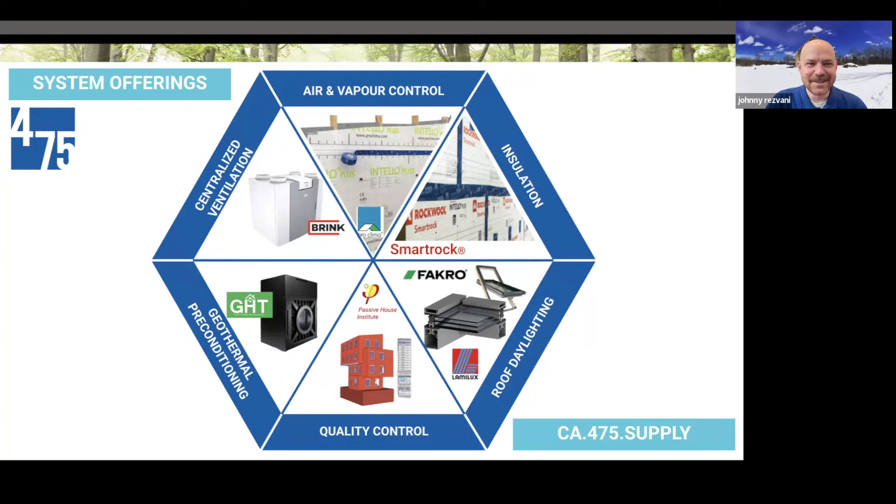This year we introduced a new presentation format here at 475 called Building Blocks. Last year, many of you joined us for our weekly Thursday office hours, which were helpful, but we saw an opportunity to make them even more focused and valuable. So we reimagined the format and launched this monthly series built around our most popular blogs, videos, and concepts.

Each month, Building Blocks gives us a chance to take one important topic and dig into it with a short presentation, followed by an open floor discussion where you can bring your questions, design challenges, or any issues you're facing on your projects. When we first came up with this idea, we honestly weren't sure how it would go, but we've now had 9 presentations this year, and the turnout and engagement have been better than we ever expected. It's been amazing to see how many of you show up and participate and help shape the conversation.

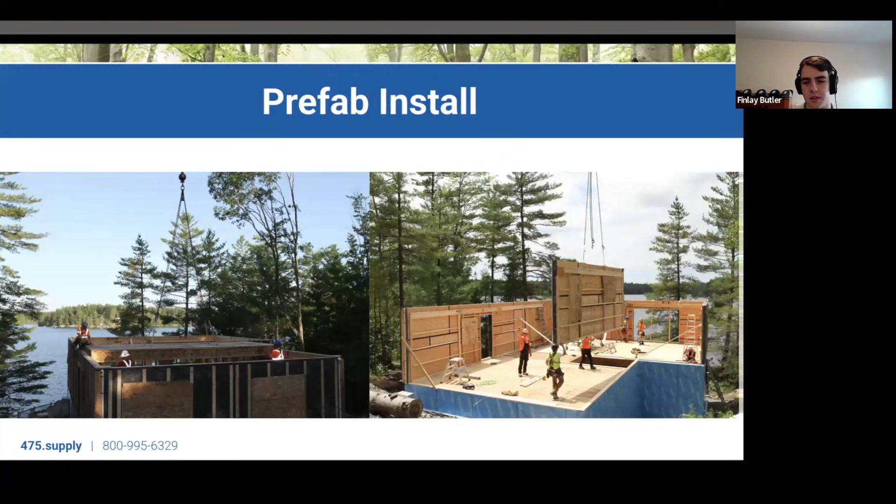So here are a few pictures of the install that are pretty cool. They have a huge crane on site and they're craning in all these huge panels. So floor systems, wall systems, and roof systems as well.

Here's a couple other great photos. The main aspect of this project that really stood out to me is that they did an open house last November for an event called Boots on the Ground, where they opened the site up to the public and gave a huge site tour.

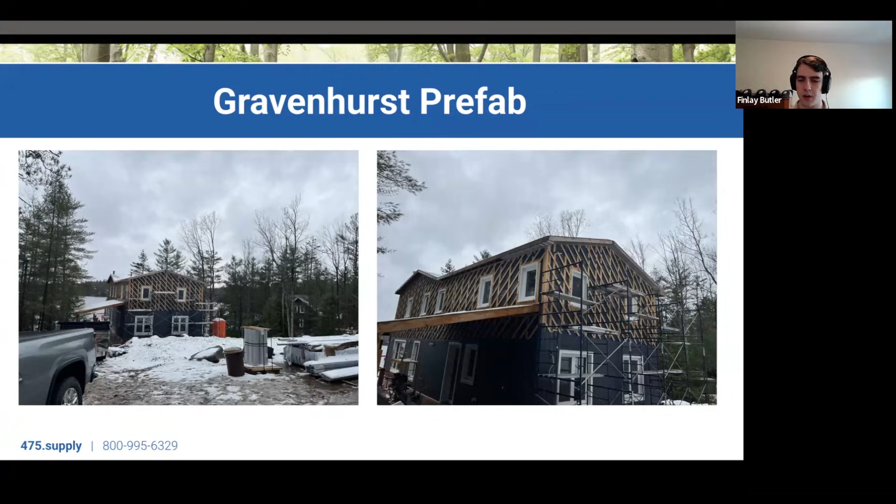They had employees from Simple Life Homes, Above Board Carpentry, and Stone's Throw Design all there, giving us a site tour, talking us through what went really well for them for this build, what made it really successful, some things they would want to carry on to their next prefab build, and some things they would maybe change for the next time they do a prefab build together. So overall a great project, and I'm super excited to see what they have in store for the future.

So the second project I'm going to be talking about is a project that's pretty special to me. It's a project by Greening Homes and again Stone's Throw Design. This project is really important to me because it was my first ever experience to high performance ever.

I actually visited this site before I was even working with 475 about a year ago. I was at George Brown College in Toronto in the building renovations program, and we were talking about all these great materials like monolithic membranes, smart vapor control retarders, high performance tapes, all these great products. But we were talking about them in a classroom setting. So it was great, like we kind of knew about them, but we didn't really know what it looked like on site. We just knew from photos.

So Greening Homes actually opened their doors to us. They shut down work for a day during the week and let 35 students come into their job site, gave us a huge site tour, and just showed us what high performance looks like on a project.

A little bit about the deep energy retrofit. It was a 1949 post-World War II bungalow with about 1,300 square feet of living space, and they turned it into a multi-generational home with around 3,500 square feet of living space. A little bit on the metric side, it scored a 0.94 on the ACH blower door test, and their target was 1.5, so they actually exceeded their target.

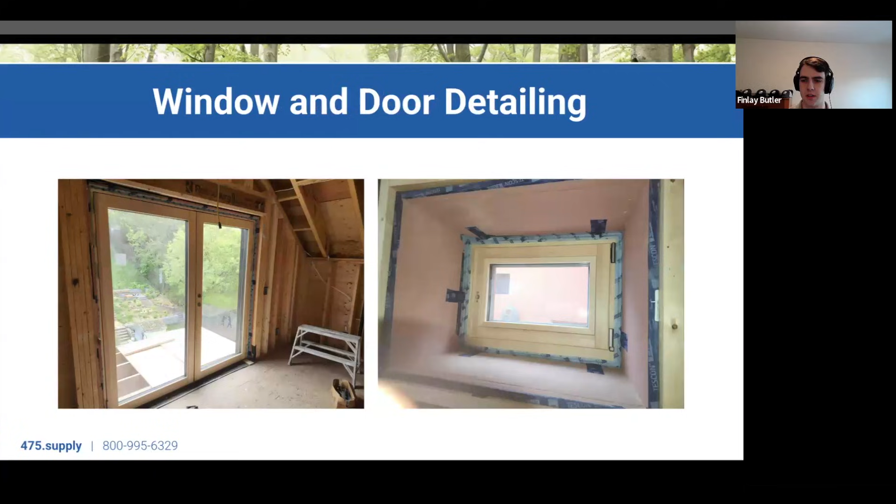So a bit back to me being on site as a student, it was great to see high performance tapes being installed with high performance windows as well, seeing how we're taping to achieve airtightness and efficiency, and just seeing all these continuity details and sequencing details actually be put to use on site - we're not just talking about it in class. And then, of course, the build was also a full Pro-Clima, which is really great to see.

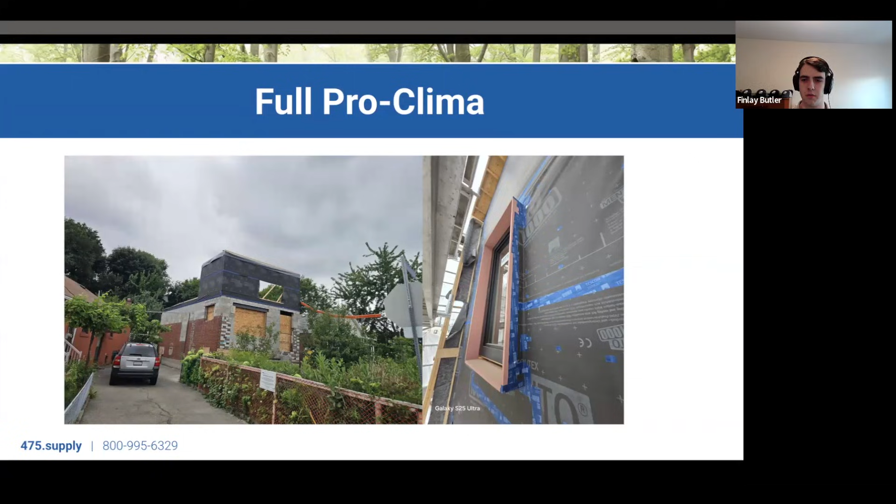It had Mento 1000 as the main WRB on the exterior, Intello Plus as the vapor control layer on the interior, and Mento 3000 Connect on the roof as the roof underlayment. So we'll get into a bit more photos here.

And on top of all of this, it's a very well insulated build as well. All exterior walls, including the basement, range from around R35 to R37, and they're using low embodied carbon insulation materials as well. So in the basement, they've used wet packed cellulose, and all above grade walls they've used dense packed cellulose.

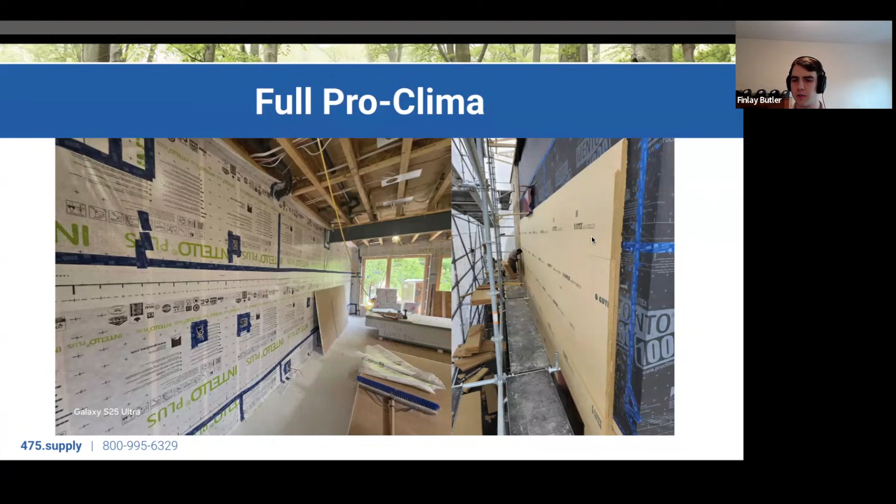And they had a cathedral ceiling, and that was around R51 for their cathedral ceiling. You can see here, they've got that Gutex wood fiberboard insulation on the exterior for the exterior walls, and that's contributing to continuous insulation on the exterior to limit thermal bridging.

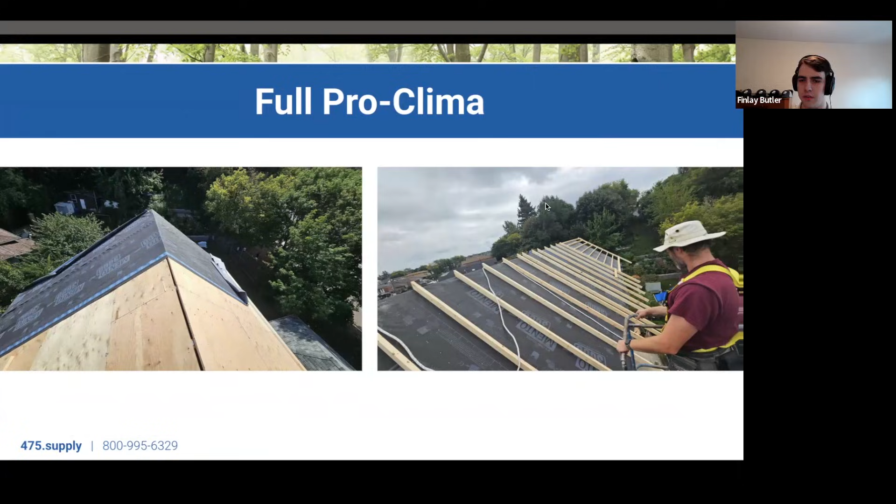As I said before, they use the Mento 3000 Connect on the roof. This is a great product because it's monolithic, so you can't actually do this with most products on the market. That's how they're achieving their roof venting here. Some great photos here with the team working on it.

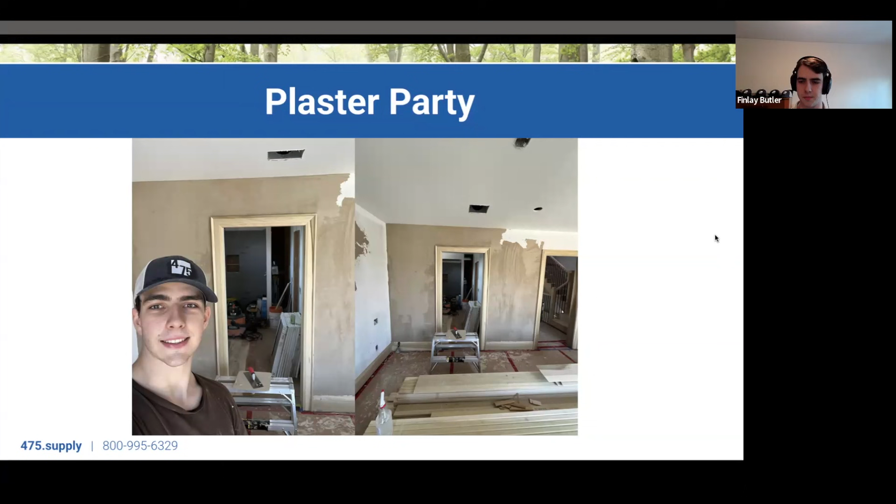Here's a couple more photos during our lunch break, and then we have the bins of plaster and just scooping it onto your trowels and all that. I had to add some finished photos as well so you guys could see what it looks like.

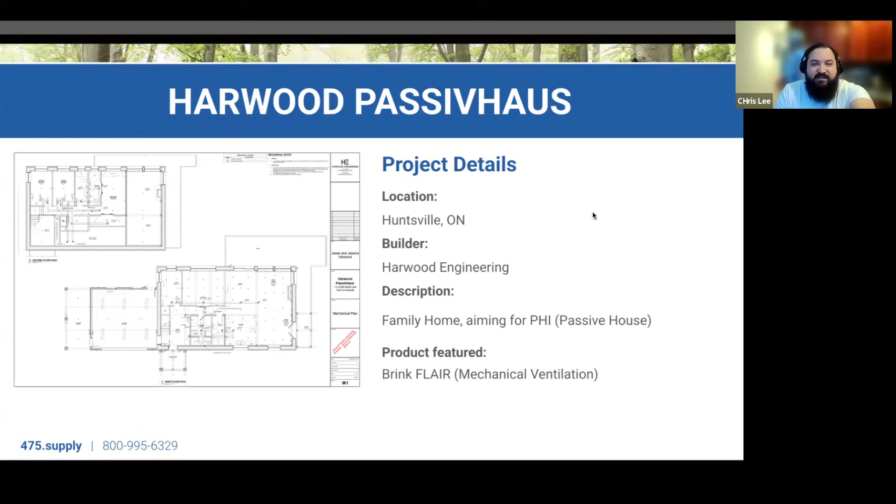With regard to what this project was, it's a family home—a house, and I think that's part of what makes it special. As much as we're all talking about houses here, this is a house that kids are going to live in and that people are really looking to thrive in, which is why we're so happy to bring FLAIR inside this space to ensure they're having fresh air indoors. The square footage of this home was 2,244, which was perfect for our Brink FLAIR 325 ERV. We used our semi-rigid ducting, which is 3-inch outer diameter.

This was a home run system, so it's separate from the rest of the mechanicals, which is very helpful for folks who don't want those two systems tied together. There are a lot of benefits to ensuring you don't have to have both on at the same time. With regards to ACH, it's around 0.27, meaning roughly every 3 hours or so you're going to have brand new air inside this space.

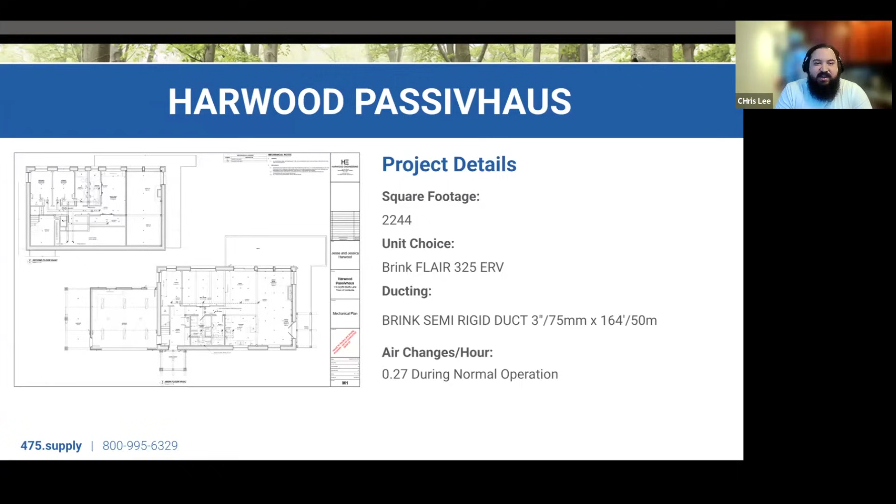Big shout out to Jesse. He may be in attendance, but if not, I'm sure he'll check out the recording. I just wanted to say thank you to him for giving me his time and hanging out with me when I went up to Canada.

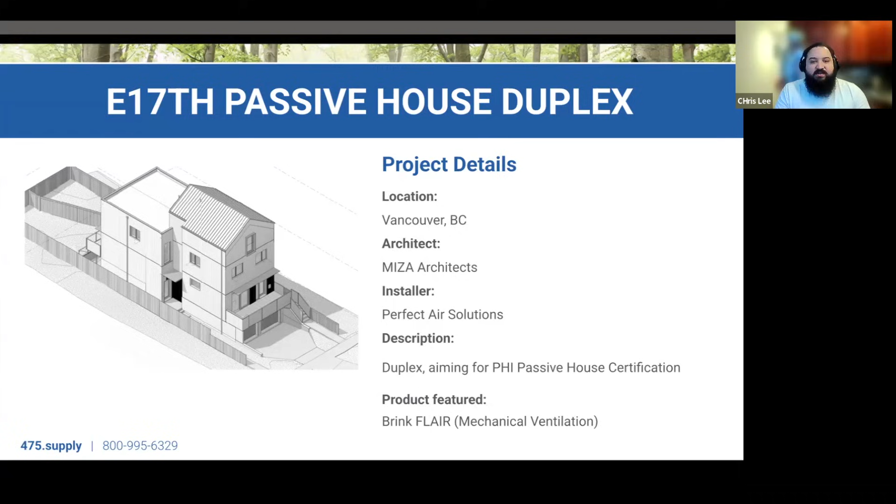The next project I want to talk about is a little bit different. This was a duplex in Vancouver, done by MIZA Architects. We've got a rendering over here on the left. The installer was Perfect Air Solutions. This one was really cool because it was a duplex, essentially a mirror, so we were doing two projects at once while only working on the design for one. This was a great example of how, when the situation is just right, we're able to get a lot done with just one design. The duplex has two units that are almost identical to one another, which allowed us to do ventilation schemes quite close to one another. Very helpful for any projects looking to standardize things and do them in a repeatable way.

Again, this one was 2653 total. We've got more pictures over here on the left. This one utilized two Brink FLAIR 325 HRVs, which is really cool. It means each of the tenants inside this duplex will have control over each one of these units, able to boost and control each one separately. They utilized our semi-rigid ducting. These are two separate home run systems, so again not tied to the mechanicals, and they hit a very healthy 0.44 ACH, meaning roughly every 2 hours or so they'll have a complete change in the air. So they're going to have a really good time inside the space.

Moving over to some of our other projects we worked on this year. I believe this is one that my colleague Gabby worked on. This is a large deep energy retrofit, a beautiful home. Just looking at it, it looks super futuristic and awesome, and we were lucky enough to get the opportunity to work with them on this. This one's using a FLAIR 325 ERV.

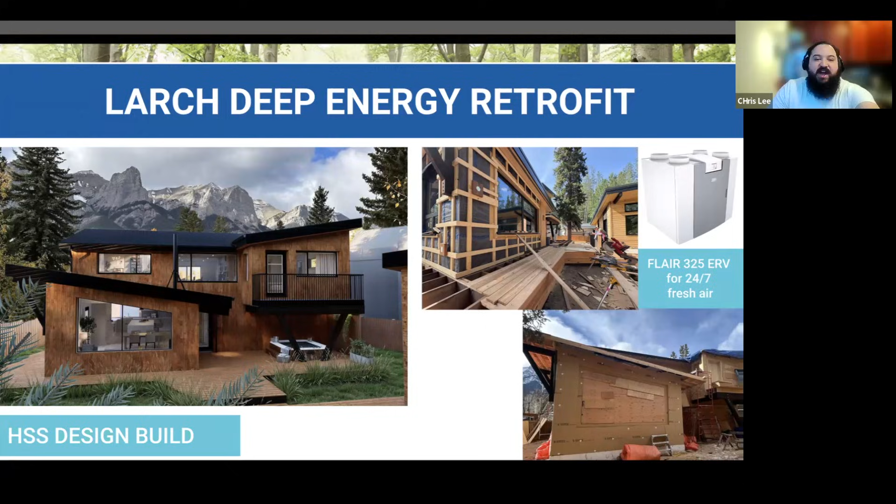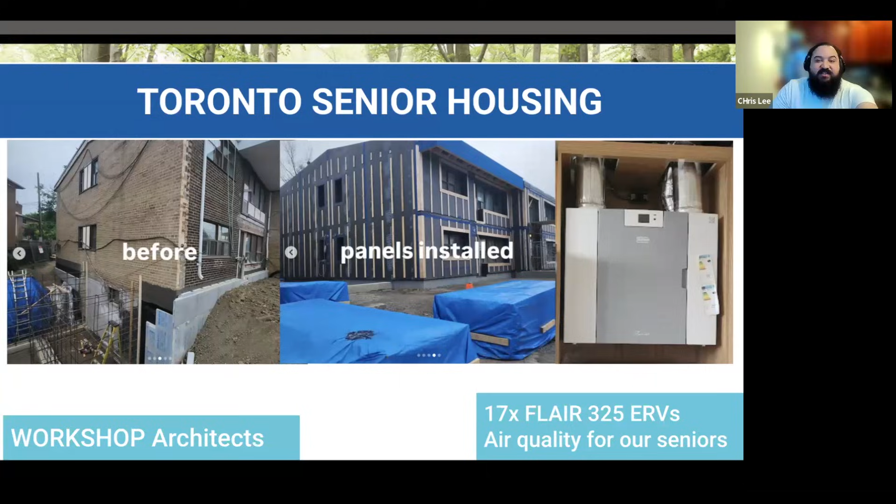We've got one other project we wanted to mention, which was Toronto Senior Housing. This one was really special for a number of reasons, but mainly, other than the fact that we're really happy to provide fresh air to senior citizens, is that it used 17 FLAIR 325 ERVs. This is a WORKSHOP Architects project, and it really speaks to the feasibility of using these units in large scale multifamily, multi-unit projects like this. We wanted to make sure to mention this one because, going back to what I said before about standardization, having a set plan for the ventilation scheme really allows for repeatability, and doing 17 units inside one space really speaks to the ability for this unit to be used in this kind of context. We're really, really happy about this project.

Move over now to Brendan David, who will speak to you next.

Thank you for having me, guys. All right, thanks Chris. I take it from here, Johnny. Yeah, take it away. So I'm Brendan David.

I'm the product consultant for Western Canada, all the kind of blue you see on the map there. Thanks a lot for joining us. Frankly, this one's quite a tough ask, this building blocks, 475, in my region included - we just have so many exciting and innovative projects. So please check out our Instagram, our blog, because what you're seeing today is really just a tiny cross-section of some of the stuff we get to see and do.

So I kind of want to start here. New meets old. This project is in Vancouver, called 837 Beatty Street. I chose this project for this blend of new and old, including new products from 475 in 2025. The bottom of the building is an existing portion with a turn of the century nail laminated timber floors, and that's going to be completely retrofitted, or has been, as you can see on the right there at projects in progress. And then additional nail laminated mass timber floors are being added above.

Metro Construction is the GC, and the architect was McFarlane Biggar with Fast and Epp doing the structural engineering work. After the existing roof was removed on the original assembly, it needed to be protected, so that work was done with the ADHERO VISTO, and that was done on site.

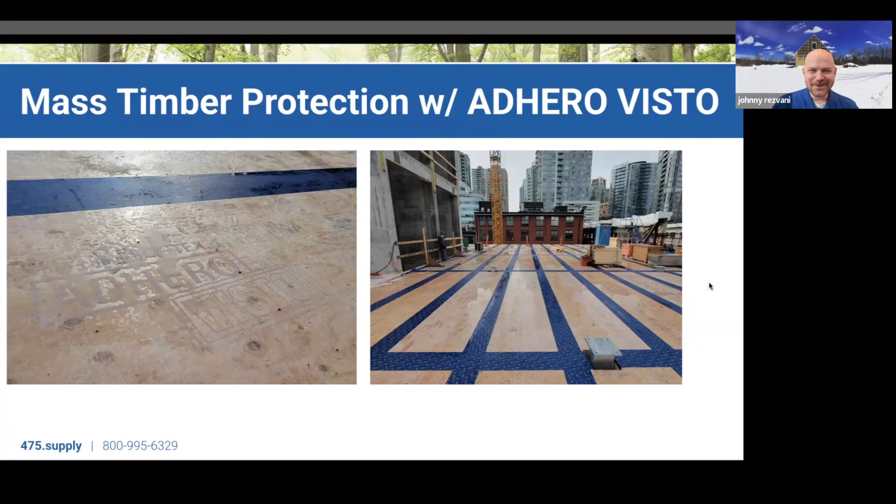For the new sections, mass timber was supplied by Kinsol, who are on Vancouver Island, and at their factory they completed installation of the ADHERO VISTO membrane, so that from the factory to installed it would be protected. You can see the large sections of Tescon Vana that were used to protect all the seams. Shout out to Sean Thainamore for those photos, by the way.

The next one I want to highlight is a missing middle type project. It's a net zero row house built in Calgary, Alberta. It's an eightplex, so you kind of see four units, and then they also have some four ground units that go down. It's very topical, right?

We're in a housing crisis, and these missing middle infill type builds are being looked at as part of the solution. In fact, the federal government recently released the Housing Design Catalog, which offers some similar designs. Keep an eye on our building block series because we do hope to dig into that catalog from a performance perspective in the new year. But this one's kind of a good precursor.

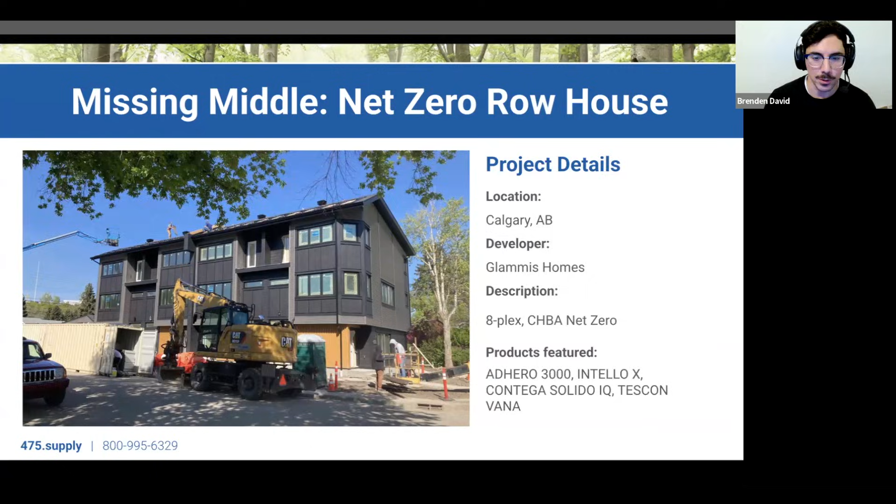The exterior featured Adhero 3000, which is our self-adhered membrane, and then Intello X is installed on the interior, providing the air barrier and smart vapor control.

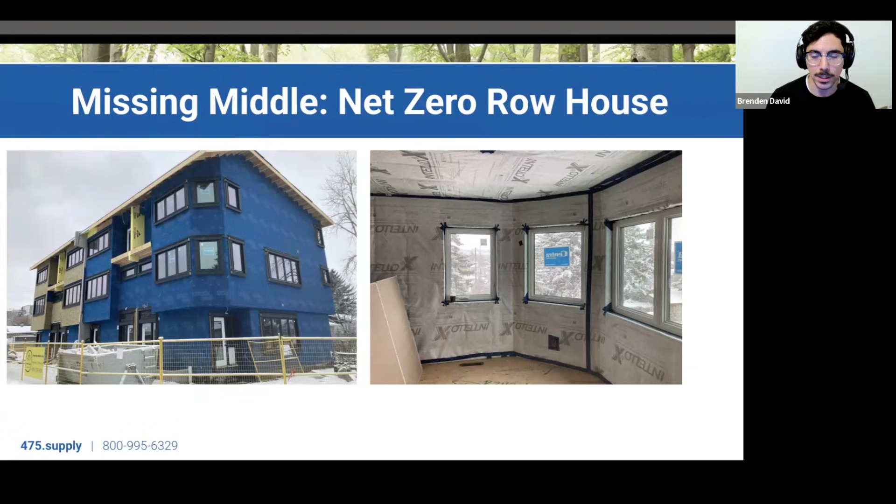On the left, you can just see the exterior insulation being installed. This required a lot of fasteners, so that was part of the reasoning to go with the Adhero, as it's self-sealing around those small penetrations like nails and screws. And of course, that also helped with the overall airtightness because they were going for a certification on this project, so we needed a nice and tight building envelope.

I was going to highlight some challenges as well. Before even building, there's a lot of discussion with the developer, like, where's the incentives for building like this? Why would someone do this versus the code minimums? And I think that's a conversation that, as an industry, we need to be pushing back on, or working with our local municipalities to say we want to see that performance is included as well, not just quantity as we make this push.

But on the building side of things, these projects are meshing that get in, get out style of residential construction and sequencing everyone's used to, which can sometimes butt heads with best practice high performance sequencing. So I was on site a lot to try and establish some of the workarounds.

A great example that can be difficult is that concrete mid wall there that's there for fire separation. On the right-hand side, you can see a lot of Tescon Vana tape, which is great, but there was a lot of connections, probably more than what we were used to, based on that really compact geometry. So I think there's definitely room for improvement to see widespread adoption and improved performance.

A project like this was a really great learning example for me. They were able to hit that net zero mark, really good airtightness scores, and very high comfort. The project demonstrates that it can be done. It's not rocket science. Again, we need to make sure that quality doesn't get forgotten about as we make this huge push for more quantity of homes across the country.

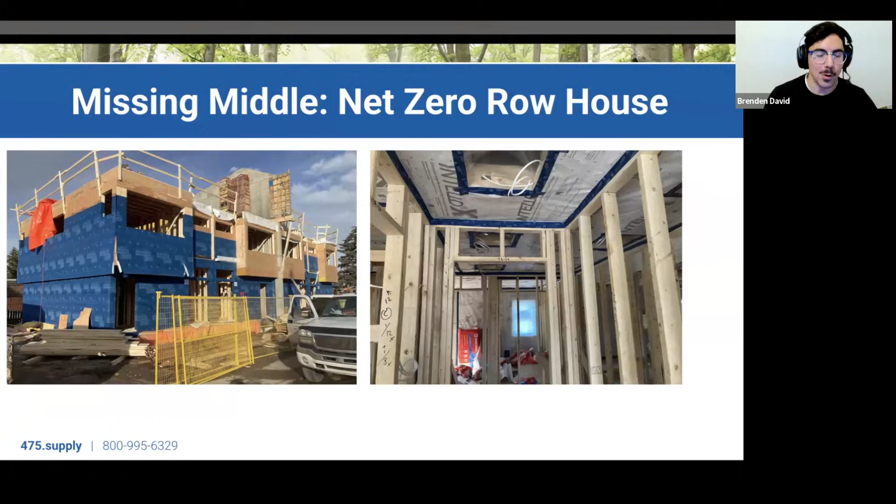I'm very fortunate to work with a number of awesome prefab partners based in my region. They all have their own niche, whether it's custom design capabilities, in-house installation experience, or emerging materials. You have Collective Carpentry in Vernon, PC Passive House in Pemberton, Tag Panels Squamish, Savick, who's in Leduc County, Alberta. Kalesnikoff is another one, they're in Castlegar, BC. They do mass timber, and since they have a new division, that's one I thought I would highlight this year because they have a volumetric prefabricated line.

So this project I'm going to highlight is in Big Sky, Montana, which you might say, well, why am I doing that?

I cover Western Canada, and I thought this was really great because it tells a good behind-the-scenes story of 475. The architect, ID Cubed, is based in the Northeast United States, and our team works with them closely there.

I've worked with Kalesnikoff Mass Timber, based in Castlegar, BC, on a few projects prior, including their own facility expansion, where they used some of our products, including the Mento 1000. So what you're seeing in the image here is their modules—they come complete with mechanical, electrical, etc.

Of course, where it was actually going in Montana, my team members were ready in Colorado so they could provide site support or additional materials. Again, these are some more completed images, in-process, of what those modules stacked actually ended up looking like in the end. I think in total it was 120 modules that were assembled within a very short time period to provide workforce housing. From there, I'll pass it on to my colleague, Jeremy.

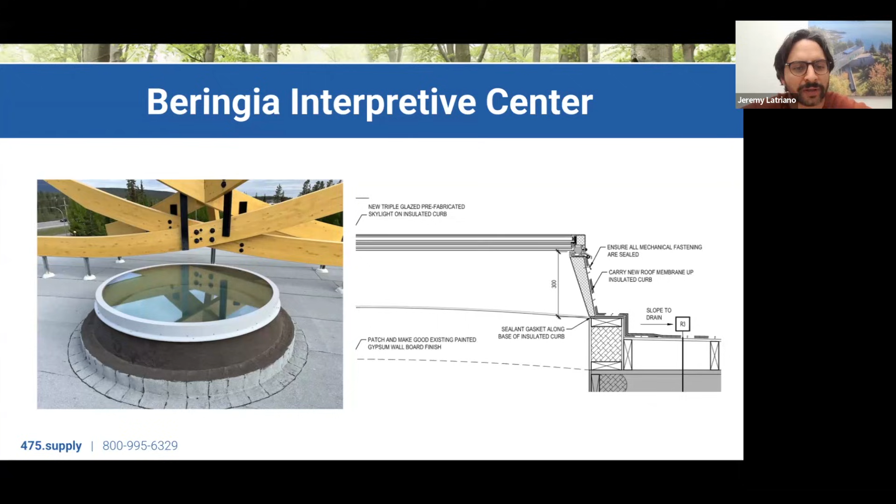This unit in particular was featured over a circular space, and at the center of that space is a large globe. So it adds to the overall aesthetic and the rounded nature of the space as it was designed. Very cool project.

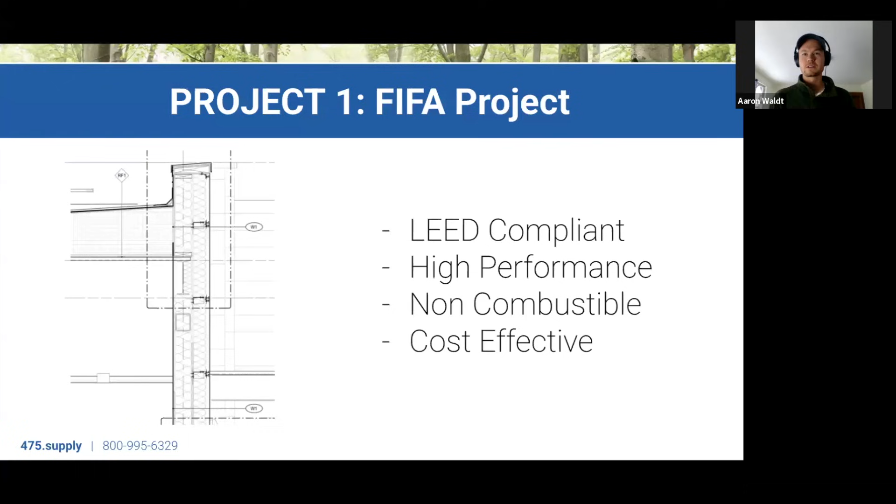So we had lots of emails back and forth talking about the plans, had lots of video conference calls and phone calls as well, just to figure out what would be the best fit. And ultimately, this is what we came up with.

So you can see we're applying a lot of those passive house principles to this envelope. We've got that beautiful rain screen right on the very outside. We've also got that 150 millimeters of Rockwool cavity rock, providing that nice fluffy sweater around the entire building.

And then Solitex Adhero 3000 was chosen as the primary air control layer. Following all that up with a bunch of other non-combustible materials that are commonly used in commercial construction. So you've got the Dens glass gyprock sheathing, you've got 2x4 steel stud, Rockwool comfort batt, and Intello X, and then a service cavity.

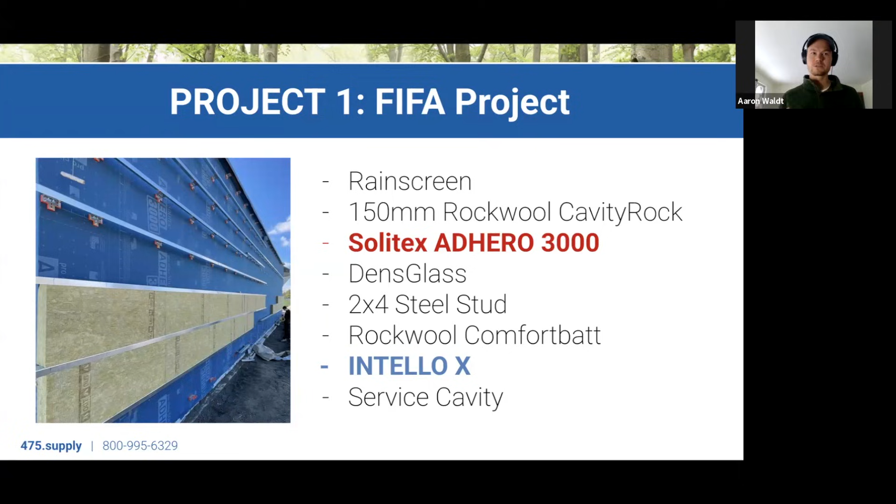So the GC did a fantastic job of installing all of these control layers. I don't know what the air tightness was yet, but I'm hoping to get it in a couple of weeks.

And then just a quick zoom in on a couple other details on the envelope. So you can see they used Viscon for really quickly sealing up some of the pipe penetrations. And then these orange plates that you see attached to the Z-girts are thermally broken fiberglass clips.

So again, another really cool use of applying those high performance principles to a more commercial project.

So why was Solitex Adhero 3000 chosen on the project? Again, it came down to those four overarching goals that needed to be achieved with the envelope in general. So LEED compliant, Adhero 3000 is red list free.

It's a PHI A+ product. And as of this year, we've gotten EPDs for all of the Proclima products as well. It's a monolithic vapor open airtight membrane, suitable for non-combustible construction. And then finally, cost effective because it's really easy to install in these commercial applications.

So a lot of other self-adhered membranes, you have to either apply a primer or a tape to the substrate before you actually put the membrane on.

And for Adhero 3000, you don't have to do any of that. You can just put the Adhero right onto that structural dense glass sheathing without primer. It sticks really well, and Adhero also sticks really well to itself.

So you don't have to go around the building another time and wrap the entire building and tape all the seams with tape. You get that double effect of saving on material because you don't have to buy any accessories.

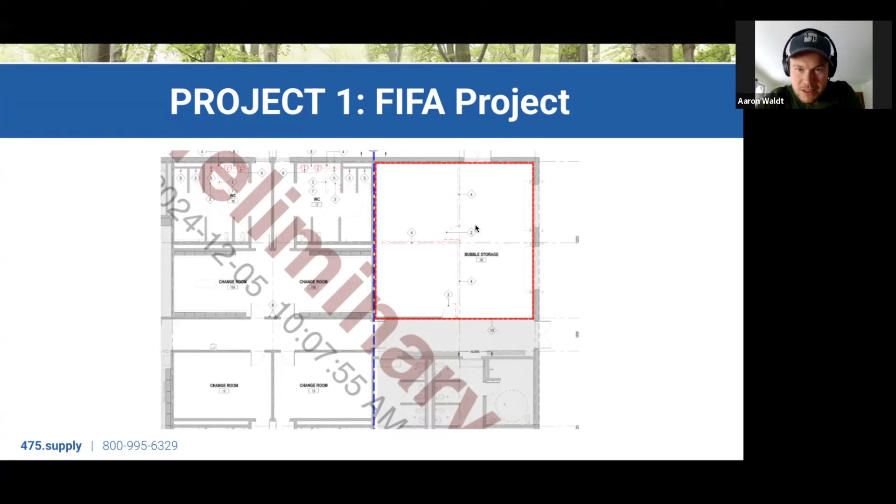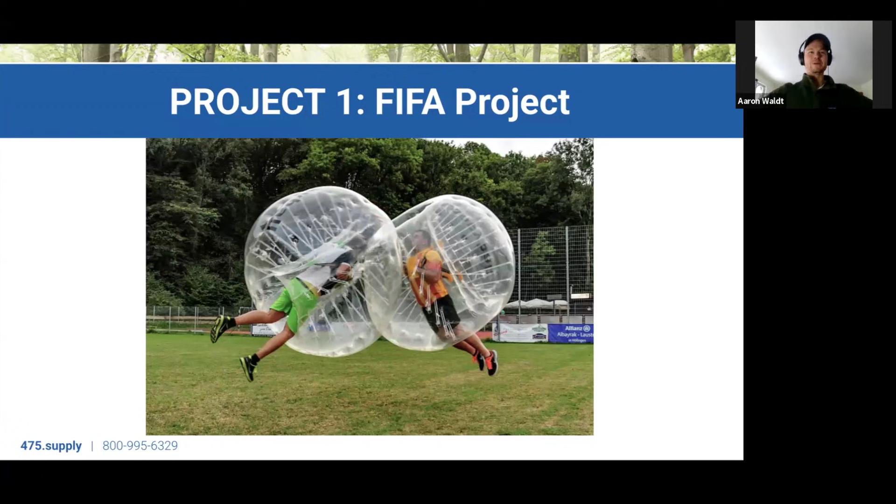But I later found out that after the World Cup, bubble soccer is coming to Centennial Park in Toronto. So you have another reason to be pumped up. It's not just the World Cup, it's going to be bubble soccer as well.

Project number 2 is pretty much just providing awareness to this organization that I've been working with for a long time. They're called Keepers of the Circle, and they are an Indigenous community based in the far north of Ontario, in Kirkland Lake, which is about 7 hours north of Toronto.

Kirkland Lake historically was very well known for its mining industry, and also oddly, a whole bunch of NHL hockey players came from Kirkland Lake in the 50s and 60s. I imagine they probably all just got together on a frozen lake for multiple winters, became really, really good, kept pushing each other, and yeah, they were on teams all over the NHL in the 50s and 60s. It's a cool little read there.

I first learned about Keepers of the Circle about a year ago at a conference up in Huntsville, where they presented their overarching vision of building an Indigenous woman-led factory that designs and builds panelized homes that can last for 7 generations. So really great initiative.

It was probably the best presentation that I've seen in a long time, just because there was also so much proof that they were working on it as well. So they were working very closely with Tooktree to help train up members of the Keepers of the Circle team, because everybody loves Tooktree's panels.